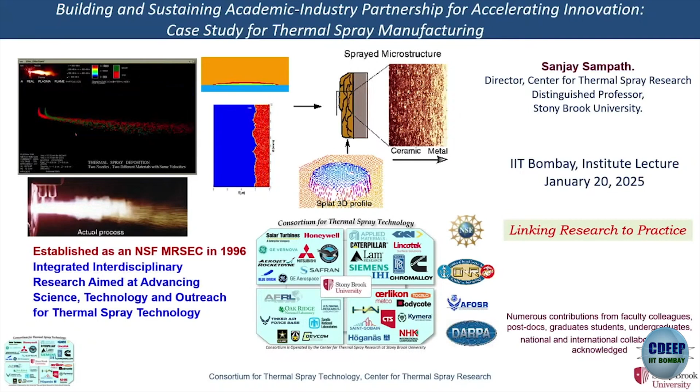So what I'm going to do is give you a little bit of a partially non-technical talk, and I'm hoping that especially those of you who are young and are looking for careers think about this in a different way. As Ashutosh already talked about, I'm a one-trick pony. I've done the same thing for 40 years, but that also has some benefits. So let me first talk about sort of, we all go through what we call midlife crisis. Some of you are young, will come to that at some point in time.

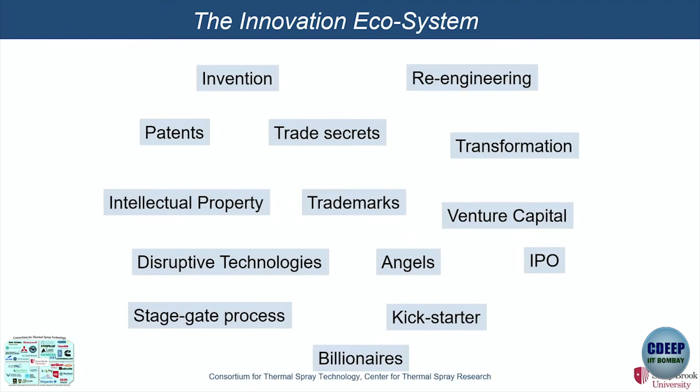But first I want to talk about, if you're going to work with industry and if you're going to make work relevant, you need to think about the word innovation, right? And you've heard a lot of these words here: invention, patents, venture capital, billionaires, things of that kind. So this word innovation has become very, very popular now everywhere, from the politicians to corporate types. And every future engineer, worker has to think about the word innovation, because that's the only way you're going to survive in a global market.

And there are lots of products that are encroaching. This is an old slide, but the important thing here is the products that you didn't know you needed until you saw it, then you can't live without it. And that's a true statement for some of us who are older. When I was doing my PhD, I didn't even have a computer. And now I'm sending emails from my phone in Jay's office a few minutes ago with a large file. So, in your career, you'll see lots of things happen very quickly, because the pace of acceleration is incredibly fast. And I'll show an example of that.

So the take-home point is, how does it affect me, right? And this is something that I started to think about. Where do I fit within this innovation ecosystem? What's in it for me? Can I become rich? And more importantly, I tell my students and my children, everybody, is your organization innovative? If your organization is not innovative, your organization will not exist, right?

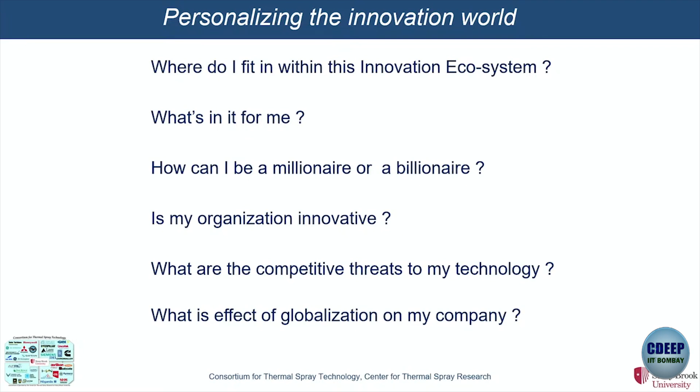There are plenty of examples of companies. Big companies have gone bankrupt, right? Like General Motors, for example, one of the world's largest companies. Because there's always competitive threats, and then there's globalization. If something can be done cheaper, faster, better somewhere in the world, it will get done there and won't be done here. That's part of the advantage also, because India is becoming part of the global circuit.

And also it's very important for those of you who are thinking of ideas that invention is not innovation, right? Innovation is basically how you create value. So you can have lots of inventions, but they don't have to work. An innovation has to work. It has to completely affect how you live in that process. And this is a very simple graph, and I'll explain this better. So invention is not enough. And that also applies to basic science. A lot of you are doing your PhDs and things of that kind. If you just do the science, the impact of that science has to be considered.

So innovation is basically, whether it's your idea from science or from invention, it's how you put it to use, and do people buy your idea? If people don't buy your idea, then it's not an innovation. So as I said, invention without innovation is pastime. It's a hobby. And there's a lot of curiosity-driven science, which we all do. I think it's very important, but that may not result in innovation, right?

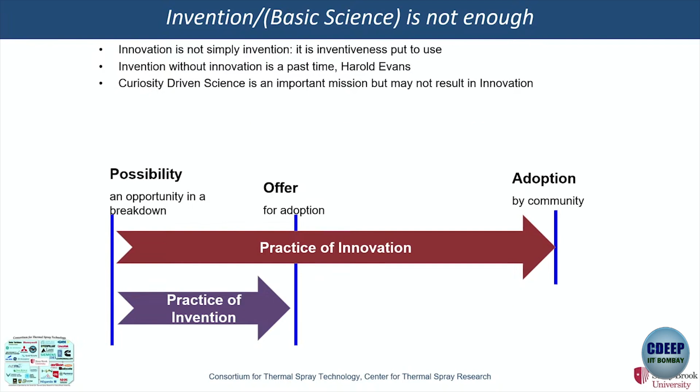But what's happening is, more and more, even corporate leaders and political leaders are always asking, well, why am I giving you this money? What am I going to get out of it? Initially all these ideas look like, oh, it's impossible, but then, I said it was a good idea all along. Now, innovation is talked about quite a lot. You have institutes for innovation, and I just saw today something about value proposition creation.

The thing is, there's a very important article I read many years ago called "Why is Facebook Killing Silicon Valley?" So what happened was, until the era of Facebook, people made money by investment, but it took a long time. And then comes along a guy sitting in his pajamas in his dorm room, and he makes $1 billion because his ideas scaled quickly. And so the internet has changed the way we think about return on investment.

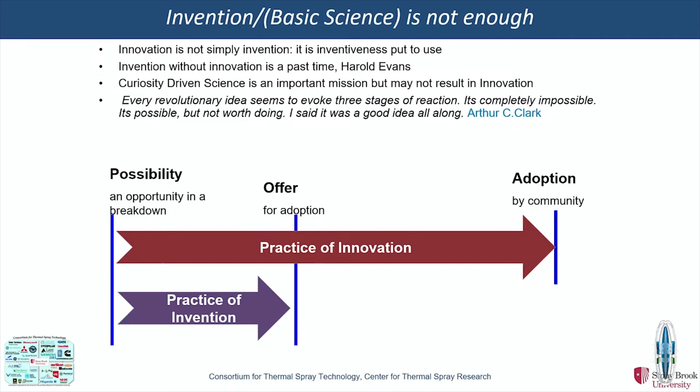So people want very rapid returns on investment, and if you don't promise that, then they won't give you the money. So this idea of doing things in software and business practices and finance, you don't have hard problems that are connected. So the area that we are interested in is complex engineering systems. And what do we mean by complex engineering systems? The picture shows it, right?

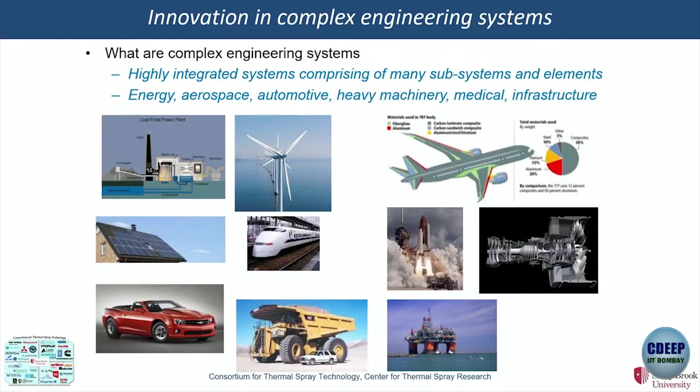Nuclear plants, aircraft engines, space, oil and gas, automotive, things of that kind, where these are highly integrated. They contain many subsystems. And the majority of our lives revolve around power, mobility, food, medical, and so on and so forth. And innovation in these complex engineering systems is much more difficult, because of these interactions of subsystems. If you come up with one idea, it might affect another one.

For example, let's say you came up with a new braking system for your car, right? Then the question is, what other things in your car do you have to change to accommodate that braking system? So your idea is not sufficient. You have to interact with others. The risk is very high. You make one mistake, it can cause a plane to crash. And in order to meet this, you need a much larger requirement. And what that does is it takes very, very long lead times and very long payback times.

And if you ask anybody, whether it's a corporate head or a financier, what you will find is nobody's got patience for this anymore. And part of the reason is, if something is going to take 15 years, you don't know what the value of the rupee is going to be in 15 years. So you don't want to make that investment. So there's a lot of stagnation in that. So the only party that supports this is actually the government. Only the government is dumb enough to accept this, but also they know that's the reason why they do it, because if they don't do it, nobody else will do it.

And so you've got lots of people to satisfy: shareholders, managers, lawyers, human resources. And then if you have a good idea, you're a college student, who are you going to call? If you call General Electric or Pratt & Whitney or General Motors or Tata Steel, whoever, how are you going to tell them your problem, and who in that company is going to listen to you, right? I just talked to one of the colleagues about that. And then if they like the idea, if they're going to pay for it, they're going to own it, right? So you just lost most of your idea. So this is a very difficult problem.

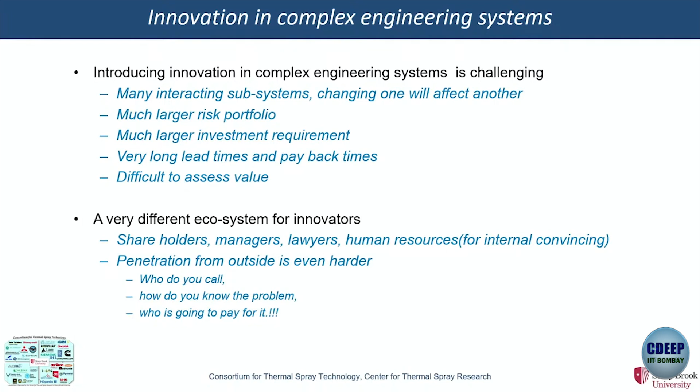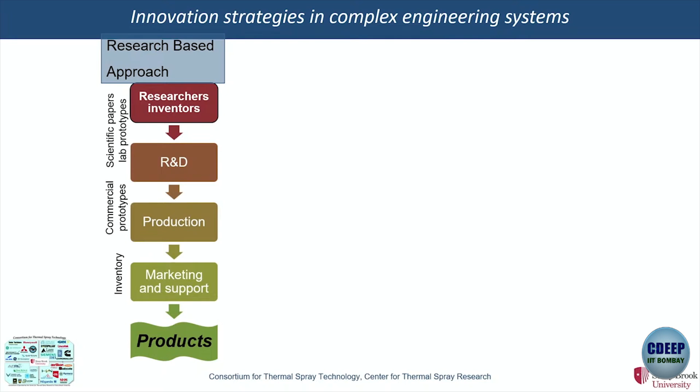And remember, I used the word personalizing the innovation world. This is how I got affected, because I had a bunch of good ideas, and it was very difficult to translate those good ideas into industrial practice. So how do people do things? So one is research-based. You're all sitting in labs, you're doing some nice research that gets translated into development, then the idea propels, you make a product, you support it, right? This is sort of what we call bottom-up. Or you do market-based. That is, you know that there is a problem, and Mr. Roy was telling me about medical implants.

You have an aging population, you have a large aging population, you know that there's going to be need for implants. And so that drives investment, because you know that there's always going to be somebody who's going to need that idea. So this is more predictable. This is where investors like to put money. This is where government puts money, because they know if they don't, nobody else will do that.

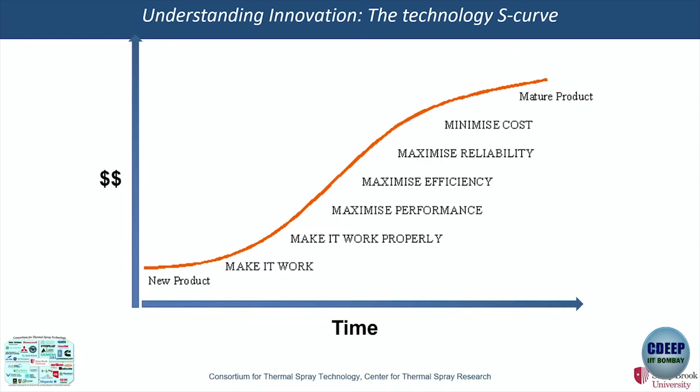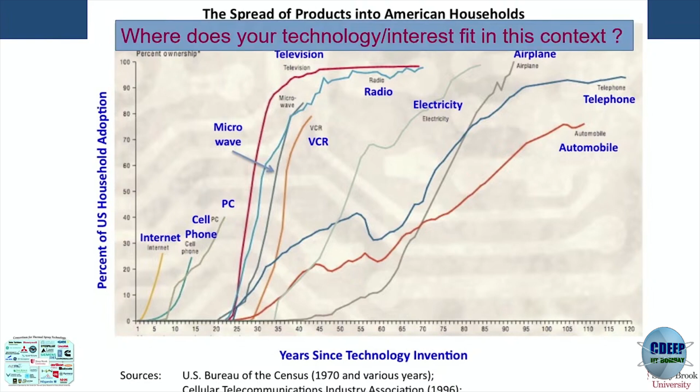So where does your technology fit and interest in that context? So this is what I call personalization. So whatever interest you're working on, high entropy oxide, biomedical implant, whatever you do, see if you can put it in this framework, and it's actually kind of an eye-opener, right? So my area of interest is thermal spraying. As I said, I'm a one-trick pony. I've done this for a long time. The nice thing with thermal spray, it never gets boring, and you'll see that in a second.

So what is thermal spray? For those of you who don't know, we basically take powders or wires or rods, in some cases solutions and suspensions, and we spray it on using some sort of a thermal device, right? A flame torch, a plasma torch, something that will melt and propel particles at a high speed. And what happens is these tiny particles, about 50 microns, 30 microns in size, impact and become a small pancake. They're of the order of about 100 microns in diameter, maybe a micron or so thick.

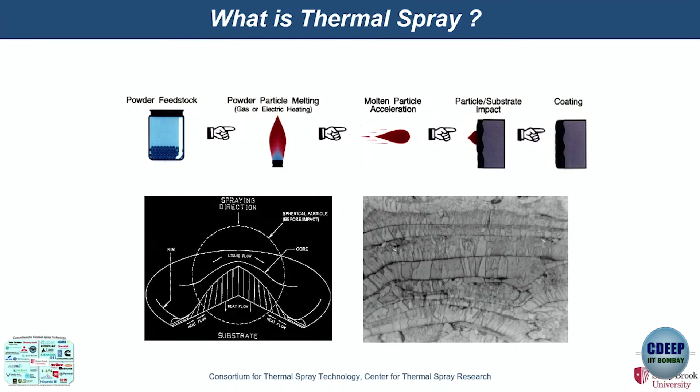And then you stack these particles one on top of another, and you end up getting a coating. So you basically become like a painter, right? You're spray painting. And so we ended up using it as a surface engineering tool to protect metallic substrates. We do thermal spray in lots of different ways. I have a video. I hope it doesn't make too much noise. Okay. So this is an example of a robot that's moving in front of a part or a component.

I'll stop that. Basically, you get a picture. Basically, what you do is this is a plasma torch, this is a combustion torch, and I'll come back to this later. This is basically to coat the inside of cylinders, and there's a process called cold spray where you use high velocity impact. So since you're depositing the materials, these are not bulk materials. You're basically layering them on top of a surface.

And because you're layering them with different processes, conditions, I can take a single process and I can make multiple different microstructures with it. So I can make a porous coating, to a dense coating, to a crack coating, to a layer. So lots of opportunities to do these interesting things. And that's the reason why the process works. It's practical, it's easy to do, and so a lot of people use it.

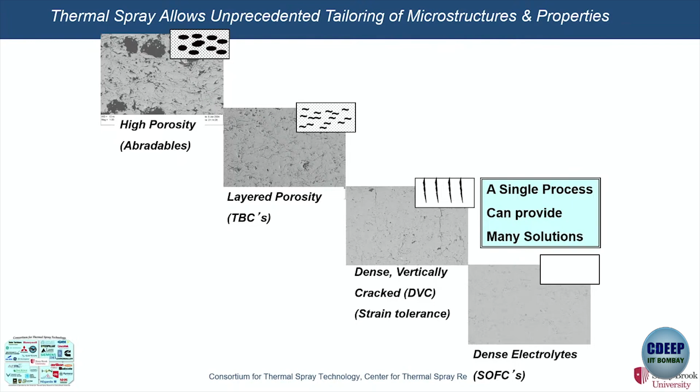So every industrial sector touches thermal spray. Turbines, majority of the parts get thermal sprayed. Landing gear, this is an example. Pulp and paper, heavy machinery, infrastructure, oil and gas, automotive, biomedical implants, and electronics industry. And that's the power of what we call a platform technology, right? And this is another idea that if you're going to work in a particular industry, choose something that's got a diversity of applications. So that'll help you with making sure that you're fitting into lots of different applications.

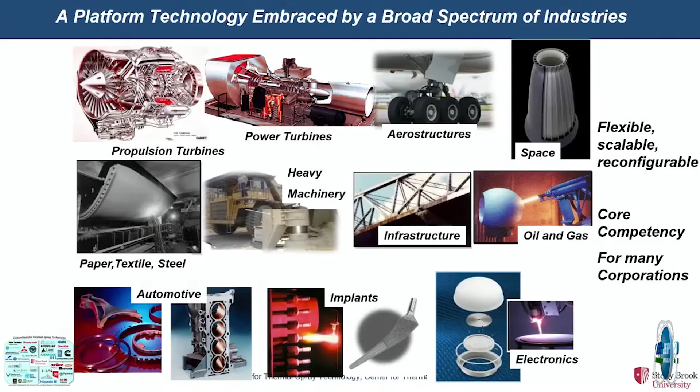It's flexible, scalable. This is another very important aspect for manufacturing, right? Let's say your application changes. You don't need a new factory. You can just reconfigure the factory to do that. You start off with one small spray cell, you do 100 parts, then you say, I need more, you can add another cell. That's what we call scalable. I want to change my material, it's flexible. And so that's the kind of technology you want that allows you to do things in a flexible way.

So if you go back in history and you look at technology, only technologies that have those kinds of features actually succeed. So you really don't want to try to do difficult things because they are hard to adopt. And so it started in the turn of the previous century. It took a long time. You see the S curve, the hockey stick, that it stays dormant for a long time. Then few people tried, then people pick it up faster and faster, and then it moves in that direction. And a lot of different industrial sectors played around with it, and that's how they built the technology.

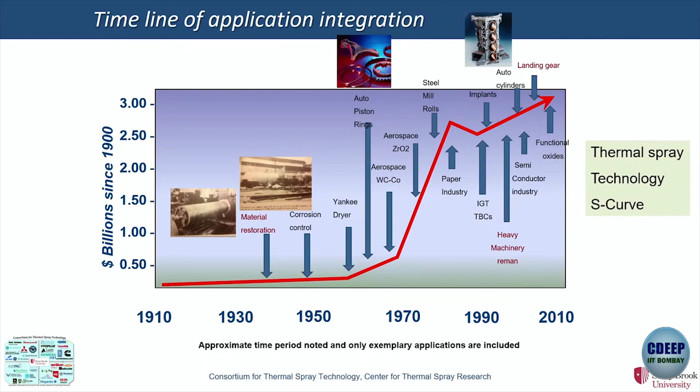Now, you always want to look at what created this sharp hockey stick, because that's when the technology scales, right? And in this example, there was one particular incident that caused this to happen. Pratt & Whitney and General Electric were building what's called a bypass engine. This is 1960s. And they needed a coating; a lot of these are rubbing against each other. When an aircraft takes off and lands, all these things are spinning.

The metals do a fabulous job. All the superalloys, the titanium alloys, the ferrous alloys, the composites. There is so much materials engineering here. It's hard to believe this thing actually works, right? In fact, I was teaching once a class based on gas turbines, because if you can understand this, you pretty much understand thermodynamics, fluid mechanics, solid mechanics, heat transfer, wear, material science, chemical engineering, combustion, everything is in here, right? In fact, if you go to a gas turbine engineering operation, there'll be thousands of engineers involved.

Basically, it's a very compact and really incredible amount of power you produce. But you can see all these things are rotating, and they're rubbing against all kinds of surfaces. And so they decided at that time that there are lots of rubbing surfaces. Many of them are operating at high temperatures, and many of them use expensive alloys. That, hey, what if I put a little coating on it, and the coating bears the brunt of that initial impact? So it was considered a sacrificial layer. And so that's why they chose surfacing.

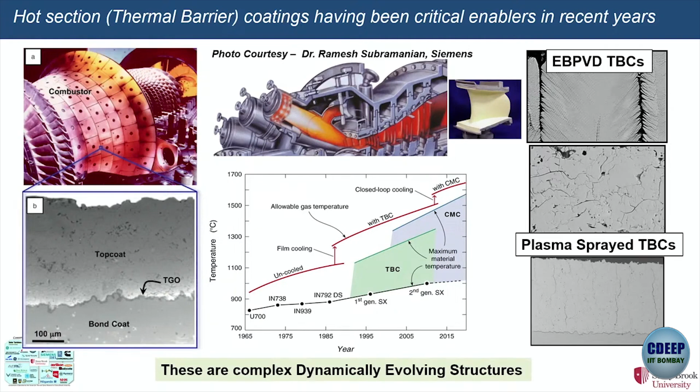And second thing is, they're not static. Every time a flight takes off and comes back, that microstructure is changing. That's an idea that we're working closely with Professor Gandhi on. And now you're asked the question, why do I need it? Because if you're a boss in a company, he says, why do I need this? So I call that need-driven innovation.

So it turned out that the amount of heat that was going through one turbine blade, that's the one that does the work, right? You've got explosive combustion on what we call the bucket, and it pushes; that's how you get propulsion. This is a single crystal, by the way, and it's internally cooled. And the amount of heat loss from one blade, and there's about 86 in each stage, can power 18 homes with electricity. And if I put this thin coating on it, I get 6 homes for free. So that's a nice way to explain to your boss how much money you're saving, right?

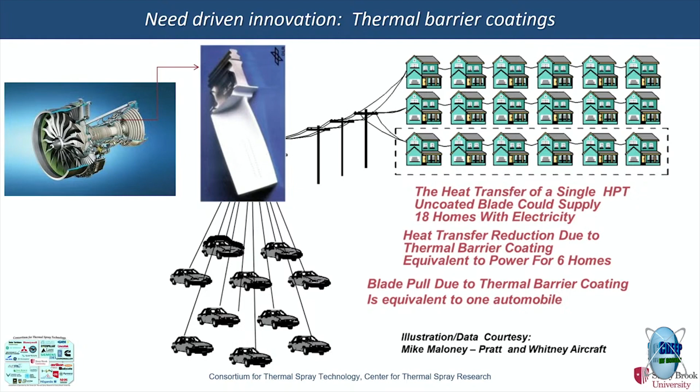Another way to do it is that the pull from just putting the thermal barrier coating on a blade is like the work of one car, if you look at it in horsepower. So these things are incredibly important. That's for aero engines; this is for land-based engines. These things are much bigger. A few of these can power Bombay, and that's exactly what it does. Tata Power has got a few of these gas turbines.

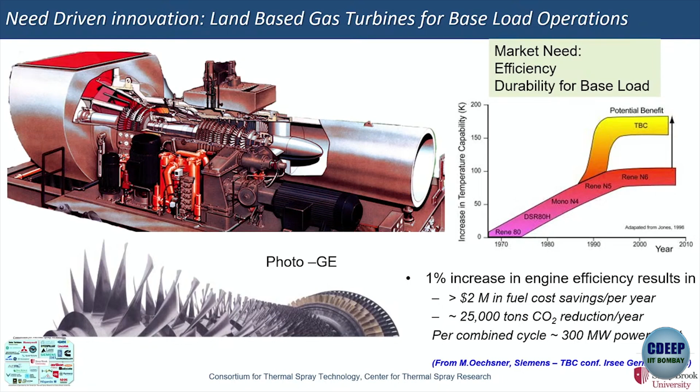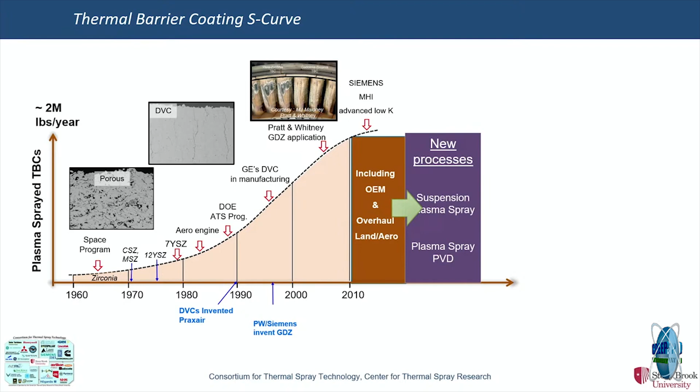And here you put the TBC on, a 1% increase in efficiency can give you 2 million in fuel cost, right? And usually we target 10%. So you're saving, these numbers are old, they may be saving tens, hundreds of millions of dollars. So the moment you have an innovation that's proven, you can build another S-curve. So you can see how it's grown from the 1960s, and now 2 to 3 million pounds of zirconia gets plasma sprayed every year, right? Now it's a real business. Of course, there's a lot of competition, so it's not so easy.

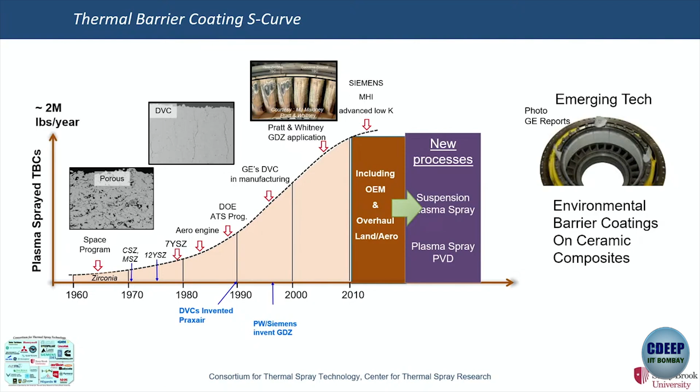And now there's an interest in moving from metal to ceramics. Ceramic composite, and GE just introduced this into their LEAP engines. And again, you need a coating here. It's a different type of coating. I'm not going to talk about that today. But look at the time, 50 years. And even today, in the majority of applications, they don't think about it as what's called prime reliant. Prime reliant means that you rely on that coating. So if a coating fails in one of these applications, the system can fail.

They tolerate like one or two, but then I've seen blades come off engines. They're designed, but even then, if you have 2 bird strikes like recently happened somewhere, you can shut down the entire engine. So the idea is that if the coating fails, the system should still keep functioning. So the alloys are doing most of the work with the cooling, but the TBC is there. One engineer once explained it to me as an insurance policy. I've got a blade that costs $10,000. I put a coating on for $300. I get an insurance policy, and I get the benefit.

I've seen engines where coatings have come off, particularly in land-based. Coating is chipped off in 6 months in some locations because they're very hard to keep. We are trying very hard to make them more durable and more prime reliant. So that was one example. I'll come back to this in a bit.

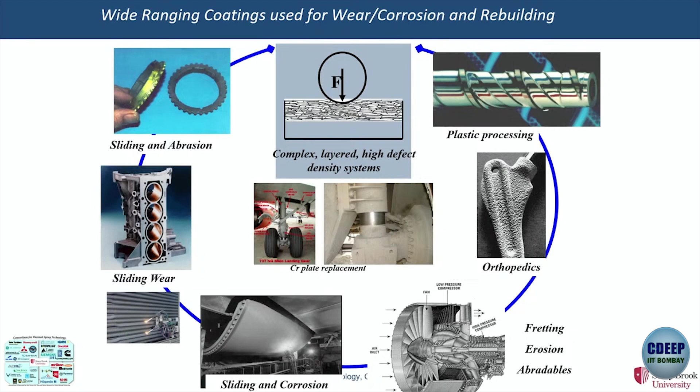There's lots of coatings. As I told you, it's a platform technology, so you can use it in sliding wear, and abrasion, and implants where you've got tribological aspects, and things like structural materials and so on. So there's lots of opportunities.

So here I'm going to give you the same example in a different way. A lot of the landing gears use high strength steel that supports that big impact load, and then the piston goes up and down, right? That's how you stabilize it. Those are made of very high strength 300M structural alloys. But you always have a coating on them because you've got a sliding seal surface, and you also have to worry about corrosion.

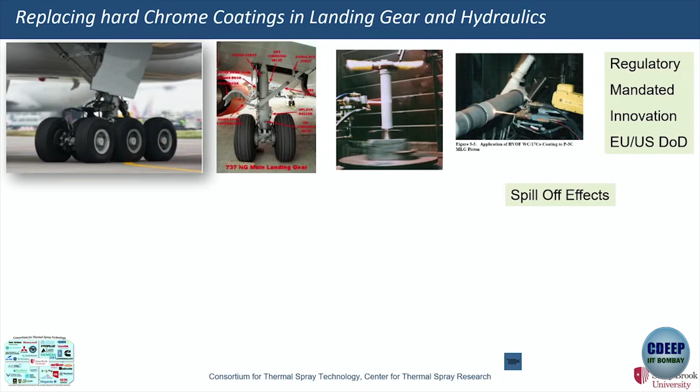So they were electroplated with chrome from the beginning of time. None of the airplane manufacturers cared. They just kept doing chrome plating. But what happened was the EU and US about 25 years ago said chrome plating is carcinogenic to humans, and so we don't want to do this anymore. So people scrambled to come up with a solution that was not using chrome, and that's where thermal spray came up as an idea. And it was quite successful.

And then, of course, there was a spill-off effect, right? The heavy machinery people, like Caterpillar, were making these shafts. They would make them originally in the US, but then they send them to India. Then who's going to chrome plate such a large shaft again? So thermal spray turned out to be more flexible and reconfigurable, and that's why it succeeded. And same for the oil and gas industry. So the moral of the story is, if we didn't have the regulatory requirement from the government, this innovation would not have been possible.

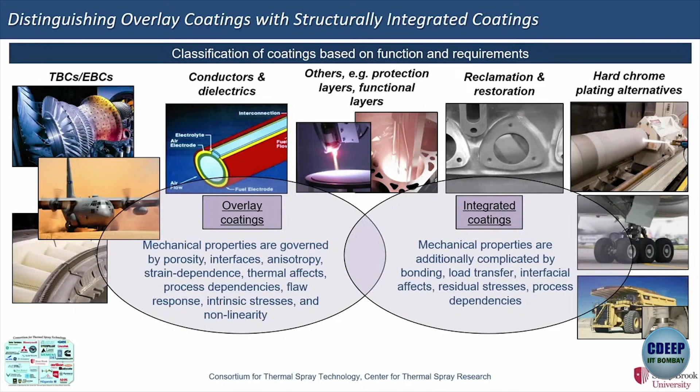One important thing that really stymied this application is many times coatings are there just as coatings, right? If you take off the coating, nothing has happened to the structure. Many of the aero engine coatings are what we call overlays; they're just added on top. They don't really participate together with the substrate. But in these kinds of coatings, the coating and the substrate are very well bonded, and there's load transfer, there's residual stress, and things of the kind. So it becomes a big problem where you have to worry about fatigue and corrosion and structural aspects, impact.

And they didn't do any new ideas with the coatings. The coatings already existed and the processes existed. But they had to prove it, and anything with aerospace takes a long time. So this is an example of lab testing, and there was a video from Airbus where they would drop this A380 landing gear from like 6 stories and it'll bounce, and you have to pass that test. And then they would do the in-flight testing. So again, the idea started with Lufthansa in the 1980s. By the time the 737 put it into their design, it was another 20 years.

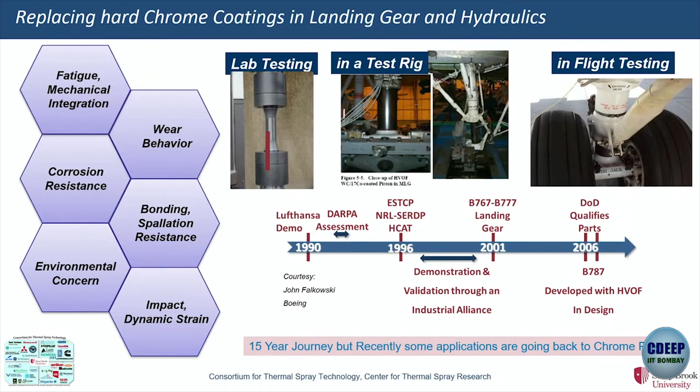Again, what has happened recently is that the chrome plate people are not sitting idle. They came up with ways to make much more environmentally friendly chrome plating. So now all of a sudden the aero guys say, why am I doing this thermal spray? I can go back to chrome. Right? So that's what I call a competitive threat to the technology.

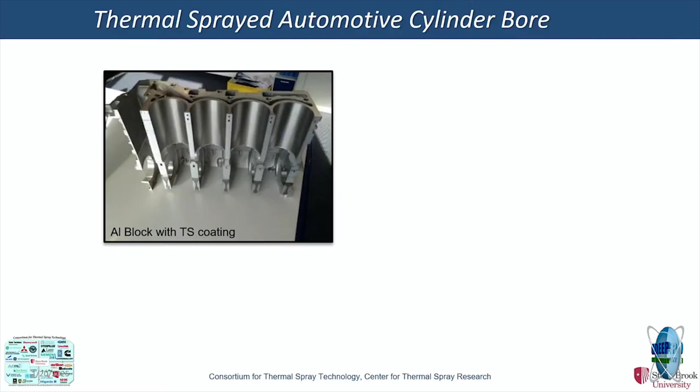The third example I'll give you is a really interesting one. This is an automotive cylinder. Many of you have seen an automotive cylinder. Aerospace and aero structures are relatively small volume, right? There's only a few thousand, tens of thousands of them. When you talk about automotive, you're talking a few tens of millions of these things.

The original cars were built with cast iron, and then they made it out of aluminum. Aluminum doesn't have very good wear resistance. So you wanted to shrink fit or cast in place a liner out of steel. Problem was, you need to first buy a liner, and then find a way to bond that liner onto the surface, and they can't be thin. So somebody I knew a long time ago came up with, why don't we thermal spray the inside with a thin coating of steel.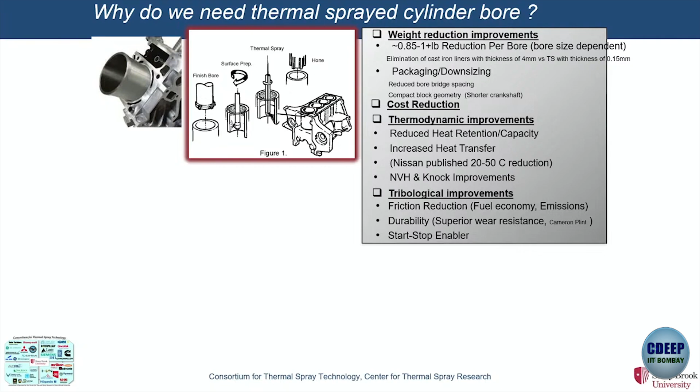And it turned out thermal spray actually has some porosity, which is great for oil retention. So it actually made the process better. So this is what they did. Instead of using this liner, they wanted to directly spray the coating on it. It actually increased the heat transfer, reduced knock, and all of those things. But what happened here was that thermal spray wasn't ready for this.

Two things. First, they said, oh, I've got a part that's this big. And thermal spray was stationary, right? I said, you can't ask me to rotate this big block, right? So my friend Martin went to all of these places: can you make a torch that spins? And everybody said, it's impossible. You can't make a torch that spins, got arcs and current and gas and all kinds of things, right?

Remember that Arthur Clarke quote? It's impossible. It's not worth doing. Oh, it was always easy to do. Turned out 4 years later, there were 4 torches that were spinning. Then the problem was, can you do 24 hours a day, non-stop, because you need millions. Oh, by the way, we cannot do any inspection at all. Whatever you spray has to work perfectly.

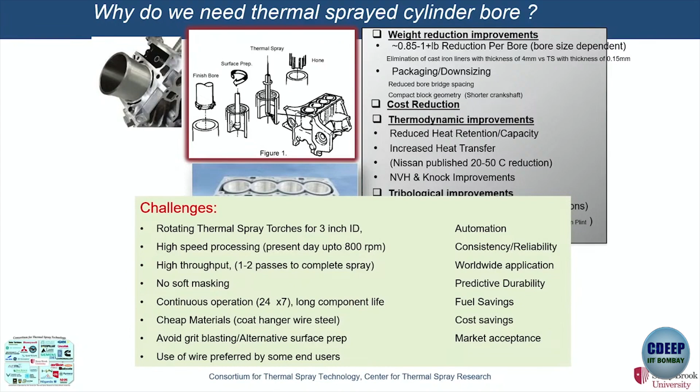So all of these requirements, and they said, oh, you cannot mask and all that. There's no time for all that. Continuous operation. Oh, by the way, no nano and all that. It has to be coat hanger steel. It literally is coat hanger steel. You know the coat hangers that they make? And all kinds of requirements. It has to be incredibly consistent and things like that. So I'll show you the technology.

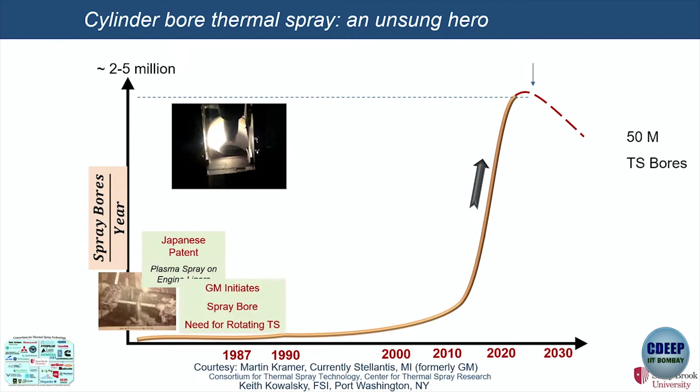My video might play and make noise, but the idea of rotating the part was around in the 60s. Actually, they did this on a small scooter engine in Japan. Started in the 80s, then it sat like this for a very long time because nobody was convinced that this is possible. And then all of these cool torches, in fact, one came from our university. Okay, it stopped. It's too noisy. But you see, the impossible became possible, right? And that was actually invented in the early 90s.

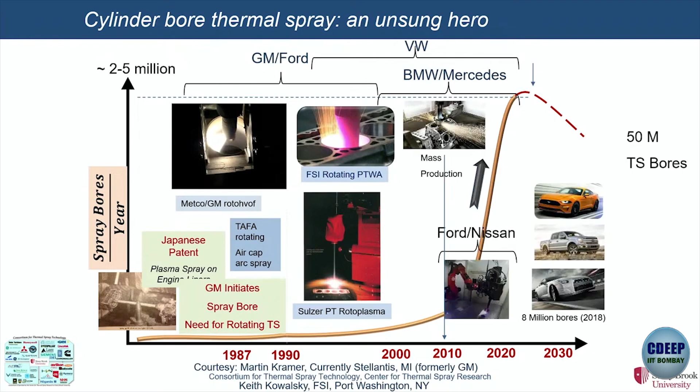And then General Motors and Ford actually built a factory, but they never put it into production because the liner guys gave them huge discounts. And then the oil price came down, the CAFE standards were reduced, so there was no real need for doing that. But then Volkswagen was already doing it, and then BMW and Mercedes came and they introduced this idea in one of their mass production lines. And that took off. That's when the technology S-curve took it.

There are 50 million thermal spray cylinder bores running today. Mostly, if any of you have the ability to buy a BMW, you can have a thermal spray engine. I don't have one. I need to get one of these days. Used is fine. Then the Mercedes is all thermal sprayed. The Ford F-150, finally the Americans have reintroduced this idea. And you see the curves going back. Why? Because the internal combustion engine is in trouble, right? Electrification means you don't need these complex manufacturing processes.

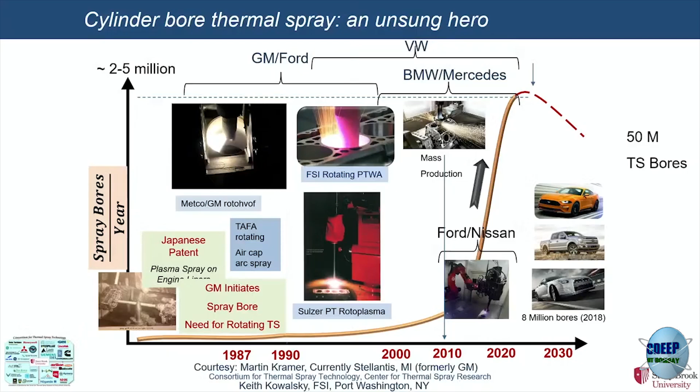I gave you some of the successes. Let's talk about the bad news. You should always talk about bad news and good news. All of this was done from top down. That is, the system demanded, whether it was through performance, remanufacturing, regulatory, or that last example I gave you. Meanwhile, a lot of us academics and researchers came up with all kinds of ideas. If you look at the thermal spray graveyard, you'll find lots of ideas, hundreds of patents, maybe thousands.

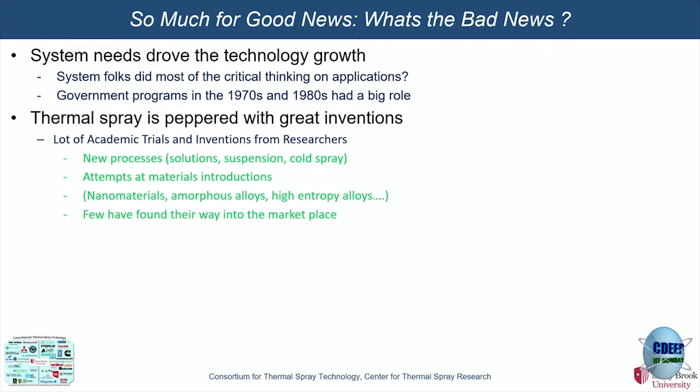Nothing has worked, right? Nanomaterials, amorphous alloys, high entropy alloys, solutions, suspensions, things of that kind. And part of the reason is because of the implementation. So it takes a long, long time. I actually have a book in my office from 1963 that my advisor gave me. The majority of the materials that we use today, and I was talking to him about your tungsten carbide, it's in this book. It was practiced in the 1960s.

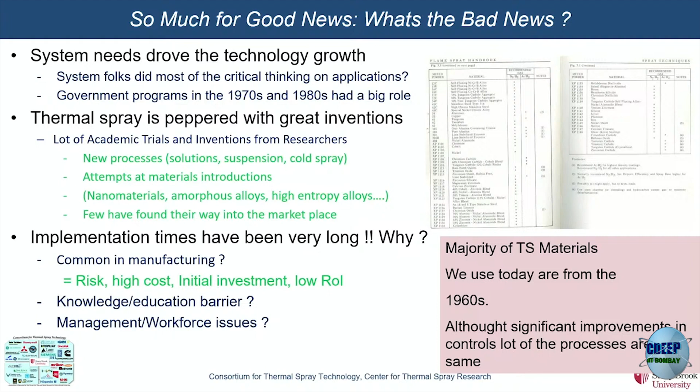It was actually Union Carbide, the Praxair thing, right? So even though you make lots of improvement, it's very hard to insert a new idea into this thing. And of course, the implementation. And the second thing is the knowledge and education barrier. This is what I've been focusing quite hard on, because thermal spray is called a special process. It's like plating and these processes. And what happens with special processes is it's not taught in colleges, right?

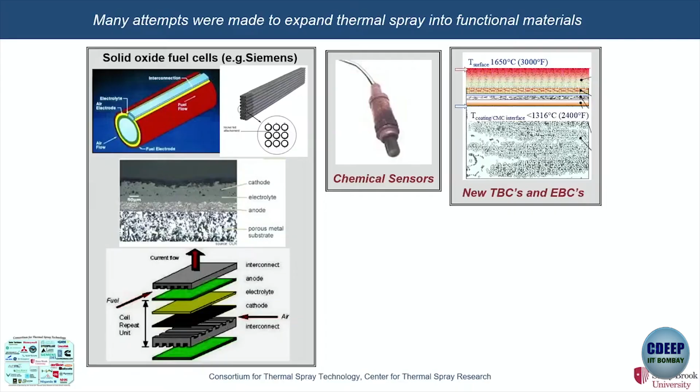So you have to kind of learn on the job. And if you can't learn on the job, then how do you practice these things? So then there's lots of attempts to try it in fuel cells and electronics and sensors and all that. Nothing worked because that knowledge just wasn't there.

So I spent a lot of time trying to understand this agenda. So let me try to place it. So this is easy, right? Market need, I give you example, system driven, makes a product. You still have to do a lot of work to get there, right? Design, prototype, test, validate. That's like that landing gear idea, right? You have to do a lot of these things. Then you have to set up vendors. You have to write product specs and processes, and you make a product. That takes time too, but it's at least a sure thing, sort of.

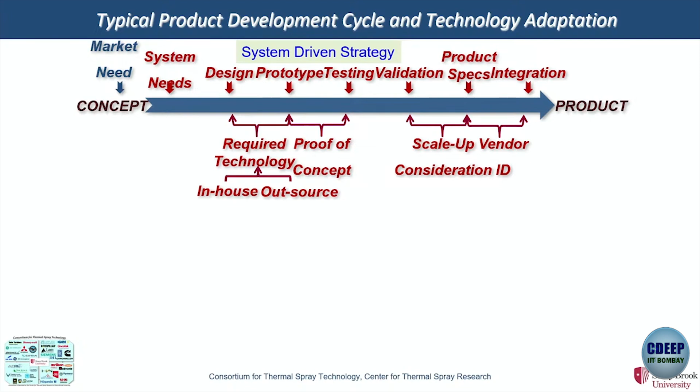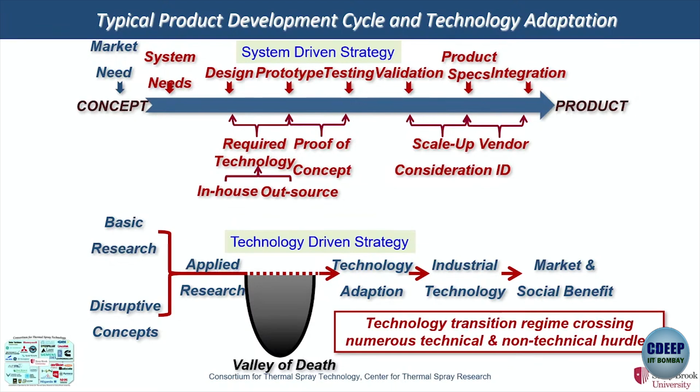But we are here, right? You're at university, you do basic research, or you come up with a great idea, like a disruptive idea, like an iPhone or something like that. But then even here, you have to do applied research. And usually what happens is, by the time it gets adapted, remember this time, this is like a bridge that, you don't know how long the bridge has to be. That's why we call it the valley of death, right? So this is where most of us stumble in order to go forward, right? Lots of hurdles that you face, and I've faced this. So we go back and I'll show you how we are trying to tackle this problem.

First is the science part. I'll get a little bit into that. So thermal spray is very complicated, not taught in colleges, because everything happens in non-equilibrium. So you got melting going from near ambient temperature to melting point, and maybe vaporization point, acceleration, and then quenching, immediately rapidly solidify. All both happen in the same place. There are very few processes that both happen at the same time, right? And then you got these very highly constrained structures. There were lots of stresses, and they are multi-scale, right?

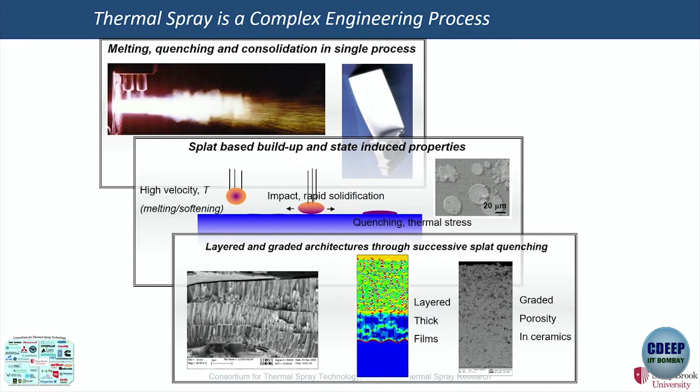I remember, Ashutosh will remember Vladimir. We gave him a coating, and he had a terabyte worth of images. I said, what are you going to do with all these images? It's like taking pictures on your phone, you never look at it, right? That's one of those things. Unless maybe AI will take care of that problem for us.

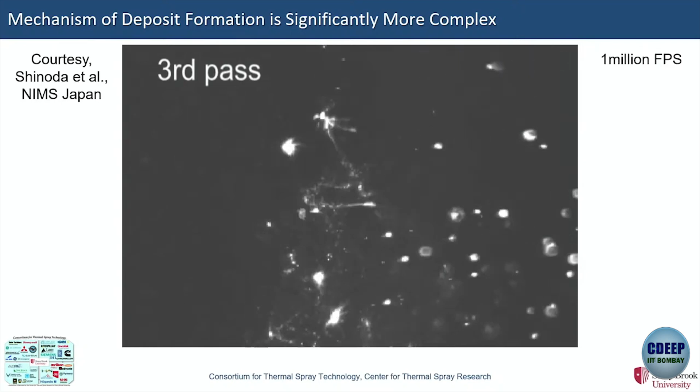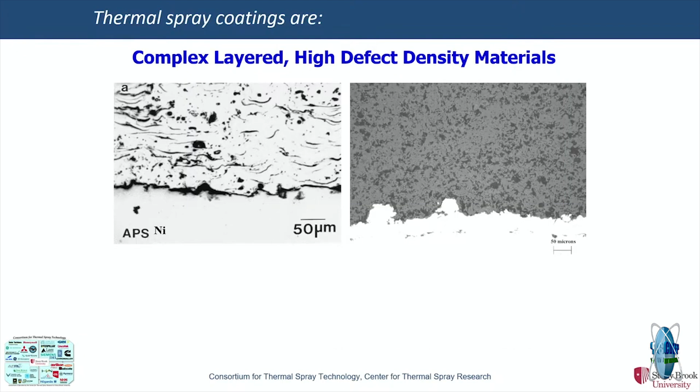And you can see this is really amazing. This 1 million frames per second was taken in Japan by my former postdoc, but you can see this is zirconia particles impacting a surface and splashing and things of that kind. So you won't see any of this standing outside the spray cell. So we call it spray and pray, or pray and spray. If you're religious, you can pray first and then spray. So the structures, this is kind of a gross example, but there's also some beauty in these structures, and how do you take advantage of them, right?

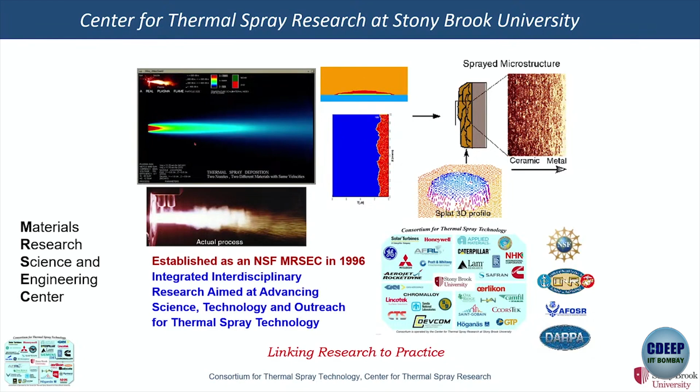So first we said we're going to look at the process completely differently, and I won't get into the details, but non-equilibrium, multi-scale, I already covered it. So we said we need a new science. So we went to the National Science Foundation and said, we want to study materials formed from extreme conditions. First we said we wanted to study thermal spray. They rejected us. And 2 years later we went back and said, we want to study materials from extreme conditions. What does that mean? Well, we wrote a nice proposal, and we convinced them to fund us what's called the MRSEC, which is kind of a prestigious award, and said we'll bring new science into this whole idea.

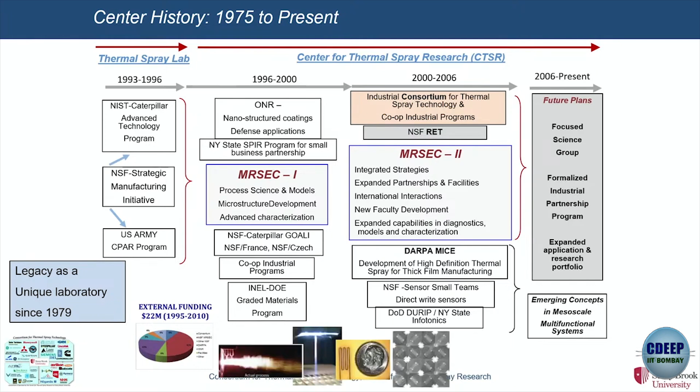And that was a big thing. We got the first attempt and the second attempt, first round and second round. So the whole was about 12 years of funding, a lot of money, about $1 million a year. And then along the way, we developed some other cool technologies. And so what it did was it allowed us to bring fluid mechanics, solid mechanics, geosciences, chemistry, physics, heat transfer, solidification, everybody together.

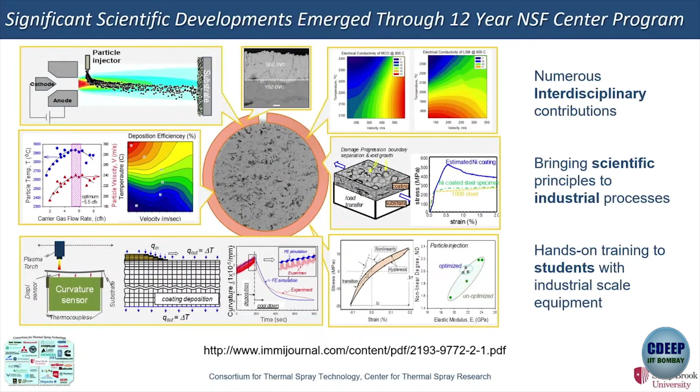We had a whole big team of faculty from the various places, not just at Stony Brook. And they brought lots of fresh ideas, and also allowed students to be taught these new perspectives. And so that was really an amazing thing, right?

And so we tackled each block sort of individually. There were these different groups. We call them interdisciplinary research groups. And we introduced, the time that I was directing it, I was very painful to some of my mechanical engineering friends because they would come and throw me all these models. I said, well, is it real? Did you include this? Did you include that? But nevertheless, it still added a lot of value, right?

New ways to characterize, new ways to measure, and that's something that we're doing now. We built a nice facility with it, and we trained lots of people with it. And they still remain friends. That's one of our nice things, because the former students also helped me take care of the facility.

So we needed to come up with a way, so what's the purpose of all this science? So we presented all of this once to our industrial group. And they said, this all sounds great, but how does it affect us? And so I went back and I couldn't sleep that night and said, okay, how does it impact somebody? And so we had to come up with a new way.

So I coined this term. I called it Partnership for Accelerated Insertion of New Technology, and my colleague Chris says, that's PAINT, and we're a bunch of spray painters, so it kind of made sense from that. So the idea was to bridge fundamental research with engineering practice. We wanted to be true to our mission that we're doing fundamental research. There's a lot of words here, I'll skip it, but basically both industry and the university have to think different, right, to do this.

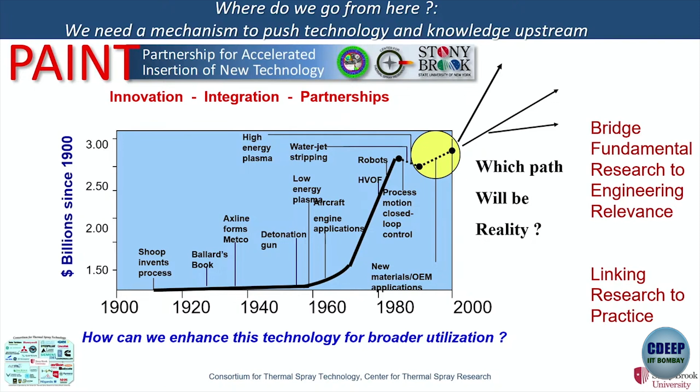So I go back to the word value. You have to show value for what you do. You have to convince that the science is robust, and you have to convince the industry that they should use the science. And then you have to change the way the workforce thinks about the future. Have we been successful? Partially. I would say when people change jobs, it dies with them.

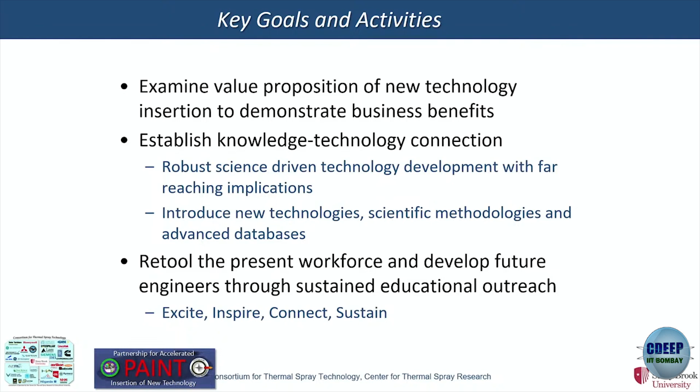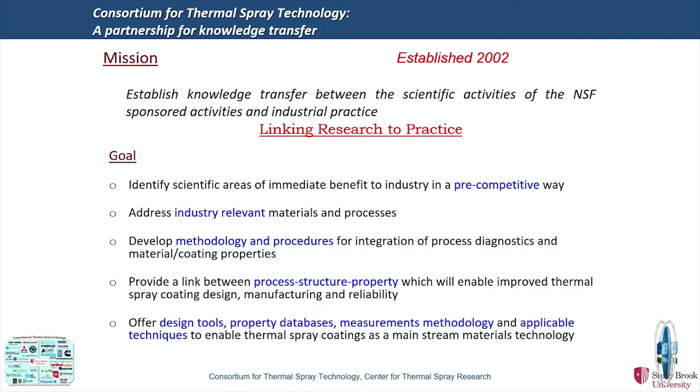We worked on industrially relevant materials, but our products were scientific, right? Whether it's the process-structure-property relationships or these methodologies. And so you can do what you want in the scientific framework, but what you want to do is translate that to value. So what does the industry care about? They want efficient, reliable, controllable process, like that cylinder bore example I gave you. Or you want to come up with better ways for the industry to use the materials knowledge with better confidence.

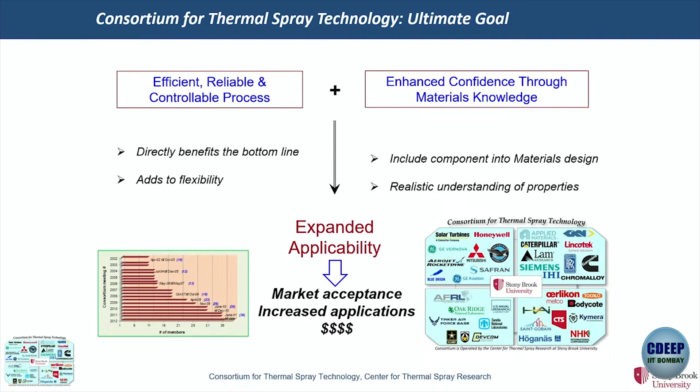So if you can do these two things, then you increase applications. They're happy, they give you money. It's as simple as that. If you don't give value continuously, then you won't get that. And we know we're doing something right because it's 22 years. Right now I'm bored, but they're very, very happy, and they want me to keep having these meetings. So, but it was not easy.

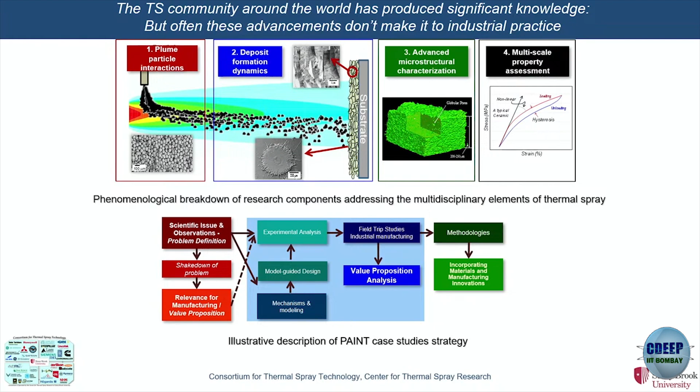How do you take all this and make it easy for them to understand? So this is busy, but let me get into the model. The first thing that happened was we would do all of these nice experiments and present. They would come every 6 months to meet with us. And they said, this is too hard for us. Then I made a challenge to them. I said, give me 3 days of spray cell time. We call them booths. And I will show you how you can use the science.

And I won't get into the details of it. We were using these beam curvature theories. And I sent my students to the company. And the idea was they would do their production applications, but we'd do the measurements. And in 1 week or 10 days, they went to 3 sites and did 80 experiments on site. And the idea was that they'd come back and present it to the rest of the members.

At that time, we didn't have that many members. It was such a success. And basically what happened was, these are all details and this is too much for this audience, but we took some very interesting fundamental science observations. We went to the factories and demonstrated how we can make processes both efficient and reliable. The two magic words for industry, right?

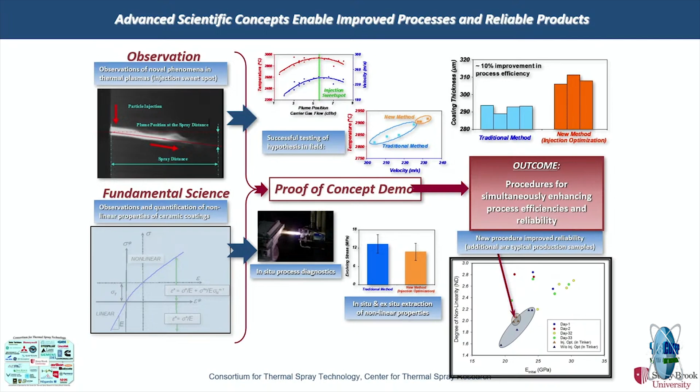We presented this at the next meeting, then my phone started to ring. We want a field trip, we want a field trip, we want a field trip. We started doing a lot of these, and then I said, it's enough, I can't do your work for you. But then the methodology caught on. So the point I'm trying to make is, if you want somebody to understand value, you've got to go do it with them to get that to work, right?

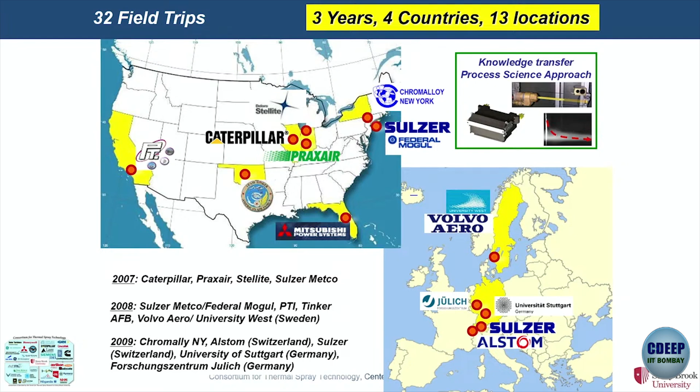So here's some examples. I want to give a shout out to Jaya here. So the industry just measures things in very low, what we call CPK values. You want to measure if the coating is stuck, you put a glue and you pull it apart, right? It works, it's very easy to do, but there's not much science here. The science is very complicated.

And so when I came here on my sabbatical, Jaya and I worked on, can I come up with a technique that is scientifically rigorous, but high throughput for industry to use? The stuff is still going on, but one of our members is funding it. That's one example. I'll go into the second example on these thermal barrier coatings.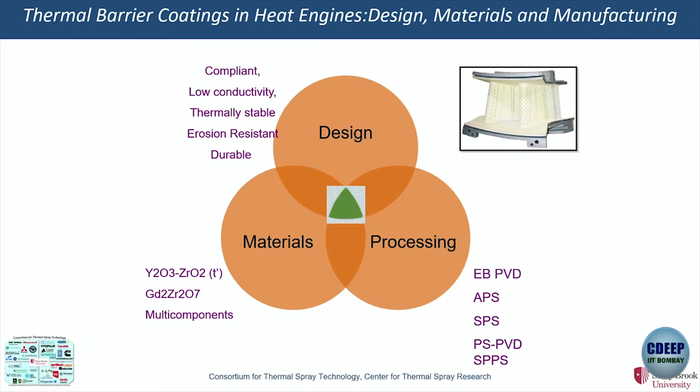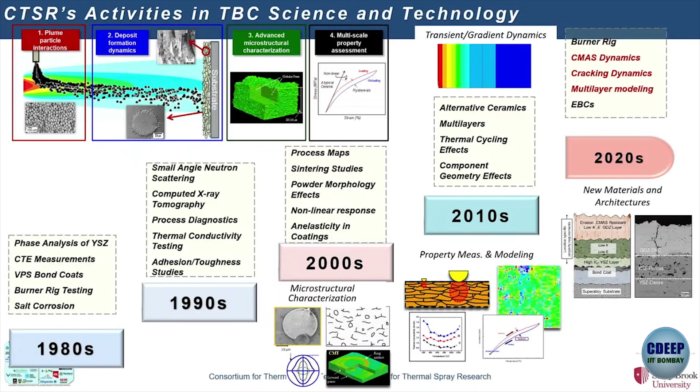And I want you to understand, this is all details, but you see how many things, starting from phase analysis, to scattering techniques, to sintering studies and nonlinear properties, to thermal effects, and to environmental effects. It's five decades worth of work. So if you're a young engineer and you join a turbine company now, how do you know all of these things, right?

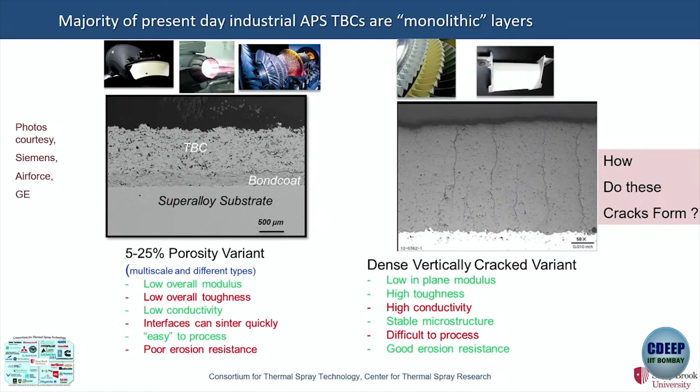So I'll give another simple example. The industry, they find ways to solve problems. They're always very, very good at that, right? So they use two types of these coatings. One is a classic porous and one with deliberate cracks. Most people think of cracks being bad. It turns out in this example, the cracks are actually very good. And this is very popular. It's widely used. But people really didn't understand how these cracks form.

So I had a PhD student, Shalaka, who, I won't go into the details here, but figured out the theory behind how these cracks form and how we can control it. And these are all published. So now, all of a sudden, we know how to understand and control these. So how can I use it? So I'm kind of going a little bit backwards here.

But I told you these engines, we call them vacuum cleaners. They pull dust, especially in India. Very dusty environment. So imagine all of these are coming into the engine, and they cause these coatings to be removed. Some compositions work, others don't. But there are lots of mechanical, thermomechanical, thermochemical issues. That's why I said, you should have an undergraduate program on gas turbines or just TBCs. It'll be enough to teach everything as part of it.

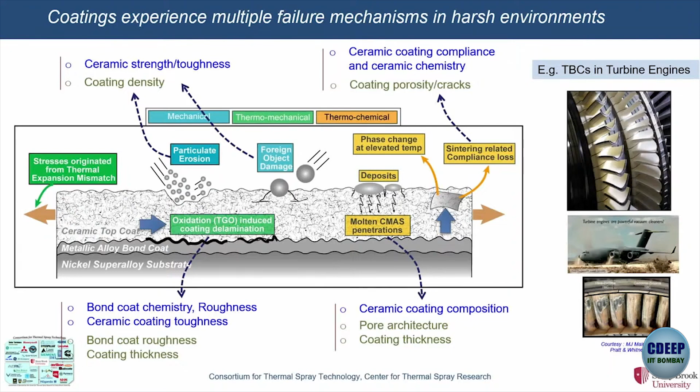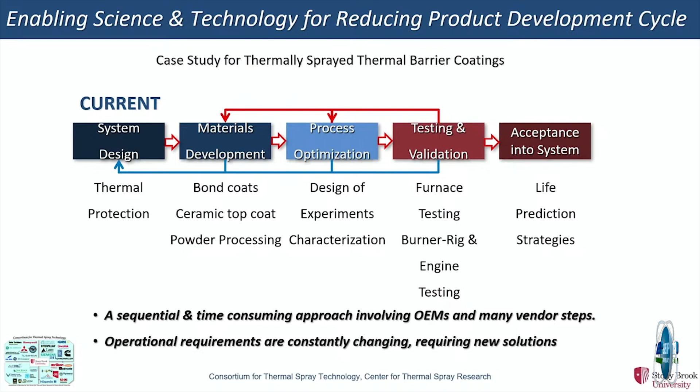So the current approach, if you come up with a new material, it'll take you three decades to get there. It's too long because you have to design the system, find the material, the right bond coat for the material. Then you've got to process it. What's the correct architecture? How do I test it? Then after I prove all of that, maybe somebody will put it into an engine test. And until it's done in an engine test, it's not going anywhere. So it's an enormous amount of work.

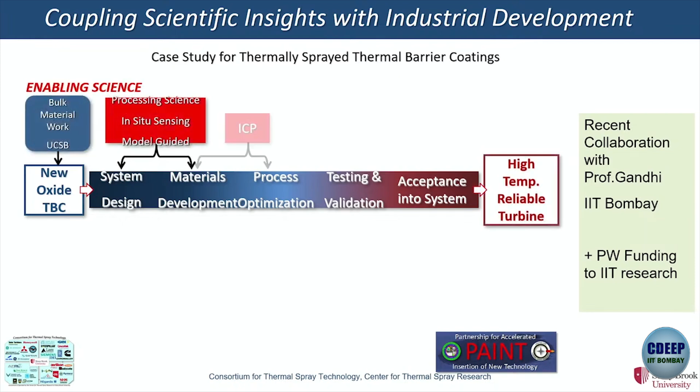So what you want to do is think concurrently and introduce science where you can. So the top is where we are working. Let's say there is some work that Ashutosh worked on in UCSB, and now we worked on the processing side using some nice instruments. Somebody studied the failure mechanism. Then on the industry side, they worked on new materials, process, testing. And so you really want to bridge these two things together, and that'll help you facilitate. And again, Ashutosh is doing some work with Pratt & Whitney on this idea.

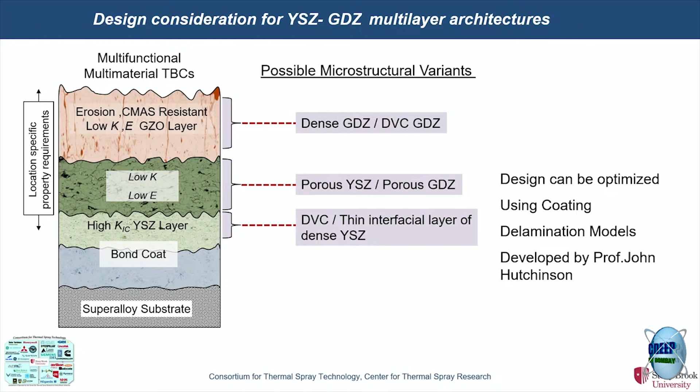And one of the interesting things that came out of our scientific thinking, using all of these models and mechanisms, is we actually designed a multi-layer coating. I can send the details to anybody that is interested, but the idea is that you can compute what is the optimum structure. And remember I talked about the cracked coatings? And we built this. This concept was demonstrated about 10 years ago as a viable scheme, maybe in 2015, 2016.

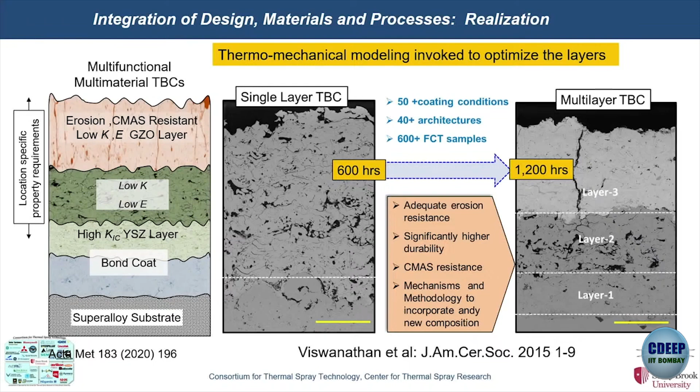Then I went shopping. I said, who is willing to test this? We think it's going to work really well because we had all the theory. So the first company said, first we've got to test it. So we gave them samples. We made the sample. GE did the test. Siemens did the test. Praxair did the test. And we showed them how our material, in their benchmark testing, works really well.

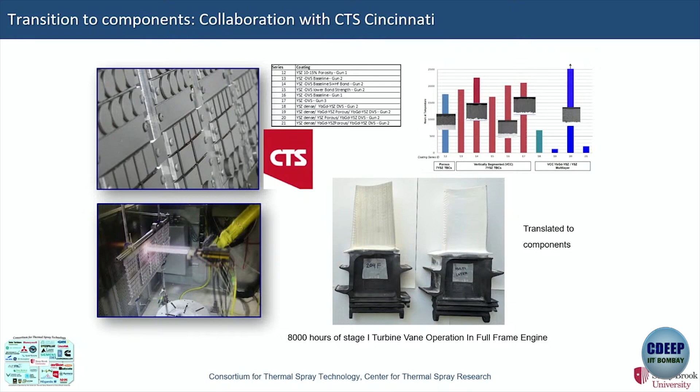So then we went to one of the spray shops, and they said, okay, this is an interesting idea. They went and benchmarked, and in fact, they didn't do our multi-layers correctly, so two of them were stacked improperly, so they failed very quickly. But then the one that never failed, you see that arrow is still going up. They got encouraged, they actually made the part, and now it's running in an engine for the last 3 years. It's actually running in a power plant. So we know it's working well because they do what's called boroscope inspection. But again, it's about 10 years from concept to idea.

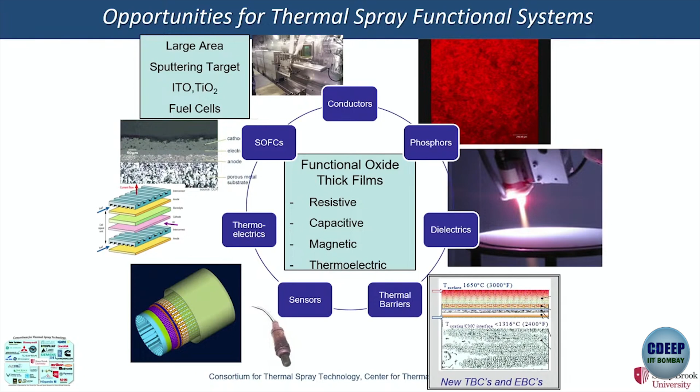The last example, and I'll finish in a couple of minutes, is you can also do these for lots of functional applications: fuel cells, phosphors, one of them we were successful, dielectrics in the semiconductor, sensors, thermoelectrics, and so on and so forth. We had a big program to take a paintbrush, which is what thermal spray is, and make a thermal spray pen. We got a lot of money to do it; it's called a disruptive technology.

Remember I talked about basic research? So DARPA gave me money and said, can you make me a plasma spray pen? And I said, it's impossible. And they said, we'll give you some money to try. I said, then it's possible. And then after we finished, of course it was going to work, right? But it took a lot of effort. I don't know whether this video will play. I don't think it does.

But basically, it's called direct writing. So you can go from a CAD to a part without a mask. You can write a thick film circuit. And because we can do that, now we can print on complicated shapes. So this is what they call a smart turbine component. The idea is to put a thermocouple inside the thermal barrier coating and record what the real temperature is. Great idea, a lot of work, still not been implemented.

But other things have been implemented. For example, this is a metallic conductor that's been deposited on polymeric film, which is very hard to do with thick film technology, and ours is a very resilient structure. So this is now being used in industry. And there are other things that we are trying. Again, this is basically 3D printing circa 2000, so it's about 20 years ago.

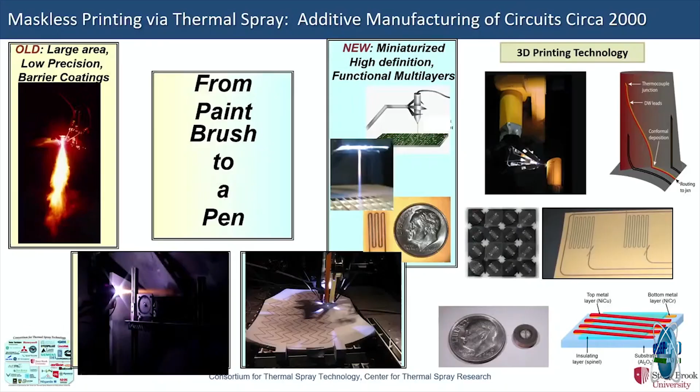So to finish off: first, it's an industrial technology, and academics followed later. Usually in those circumstances, it's easier to do things. Easy to do, but hard to perfect, right? Coatings are not always designed because they don't know how to incorporate properties. How do you design? And then the education: nowadays all these companies ask me to teach thermal spray courses to their employees because nobody has even learned that stuff.

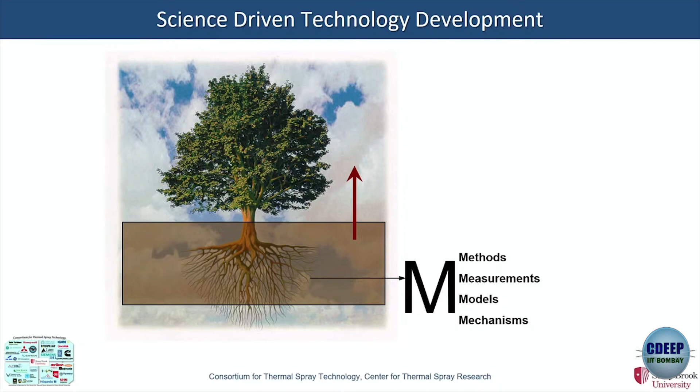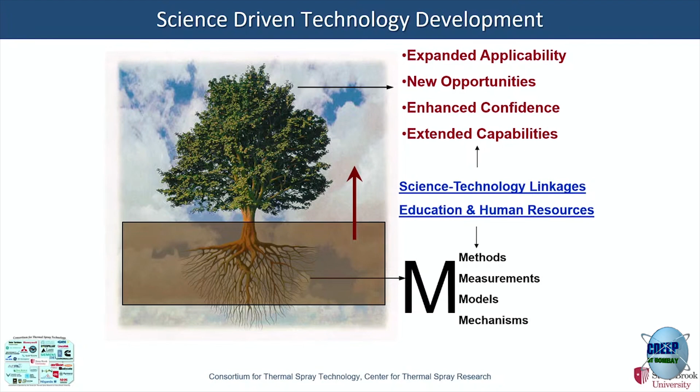So, what do I mean by science-driven technology? It's like a tree, right? The more you learn, the higher the tree grows. And so what we are trying to do with our partnership with industry is to do methods, measurements, models, and mechanisms. So we're not competing with anybody. And the idea is that hopefully it will open up new opportunities. More important than anything else, it gives enhanced confidence and extended capabilities. And so that's the bridging. It's not just science and technology. The most important, in my view, is education and human resources.